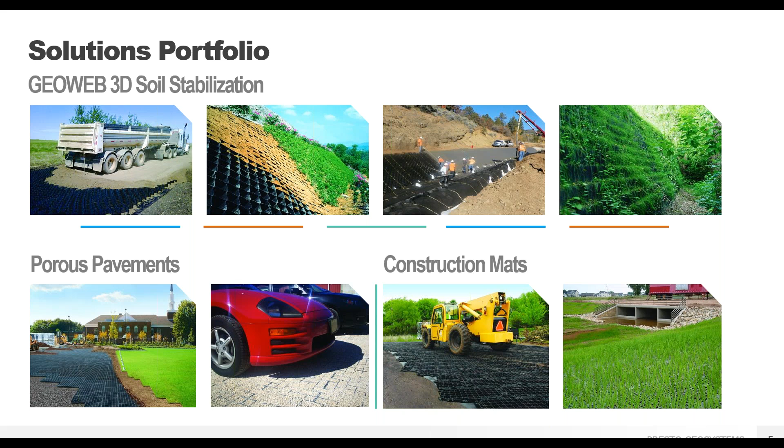Presto operates in 3 general product areas: soil stabilization using our GeoWeb geocells, which can be used for load support, slope and channel protection, and building green retaining walls; porous pavements, of which we have both vegetated and aggregate solutions; and lightweight reusable construction mats. Today, we will cover some GeoWeb solutions as well as our aggregate porous pavement product and a few of our construction mats.

An important thing to keep in mind as we go through this webinar, the trails that are made with our products are all considered permeable trails. That is, there is no impermeable paved surface being placed. The final surface is going to be a stone or sand material. This lessens the environmental impact of the trail, reduces the amount of heavy equipment required for installation, often in difficult to reach locations, and improves the overall cost and speed of the project.

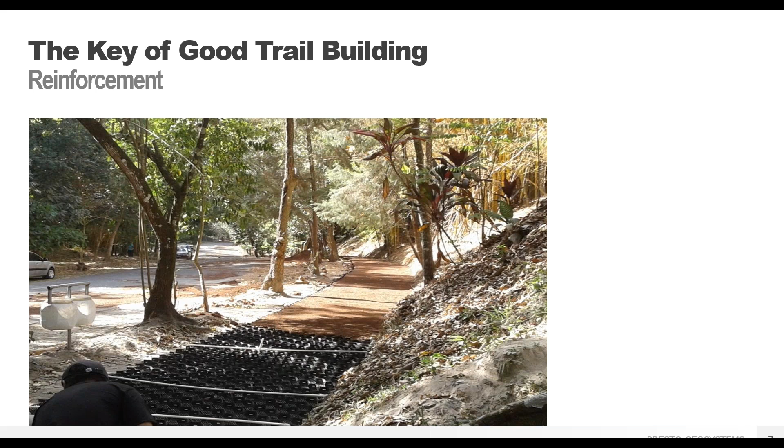We'll begin with what makes a good trail. The first aspect of the design is the reinforcement of the trail itself. Especially when the trail moves through sensitive areas, keeping the path intact is how you keep people away from damaging vegetation or getting lost while wandering. The trail needs to be clearly delineated and needs to be reinforced enough to stay in place over time. Using products specifically designed to act as the reinforcement of the soil or stone means the trail will last longer and will not encroach on the surrounding environment.

The next key to a well-designed trail is drainage. Ponding water can ruin a trail surface, and water that runs off the trail into unreinforced areas can scour and damage those areas. As I mentioned, all the products from Presto are considered permeable, and it is precisely for this reason. By keeping the surface permeable, the water infiltrates at the point of contact right when it hits the trail. The water can then permeate down through the product and into the subgrade, entering the groundwater system. The water won't pond at the surface and it won't run off or collect outside the reinforced area. This keeps the trail in the same condition no matter the weather, so there won't be any flaws or failures created below the surface that you can't see.

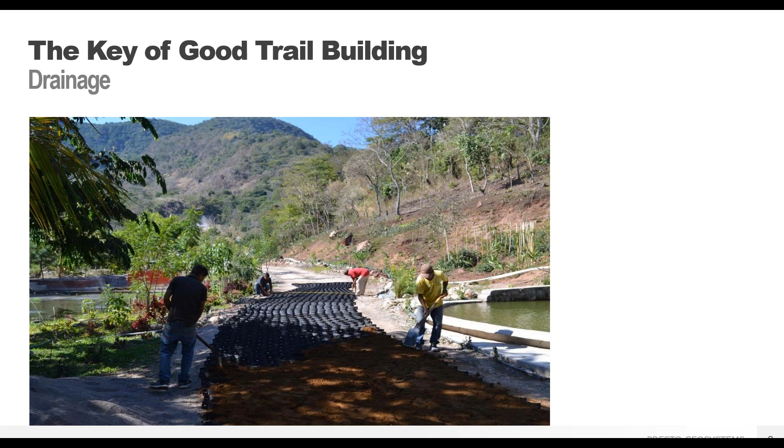The last thing to consider when designing a trail is how to confine the surface. Loose aggregate stone or sand is easily moved under shoes, hooves, tires, and water, leading to ruts, holes, and generally damaged trail areas. When the trail surface is damaged, people are going to want to move around the damage, leading them off the trail and into unprotected areas, potentially disturbing sensitive environments. Keeping the surface in place is an important feature of the products from Presto. When the stone or sand is properly held in place, ruts cannot form and the material can't be washed away. This greatly reduces the amount of maintenance required because the trail surfaces aren't degrading.

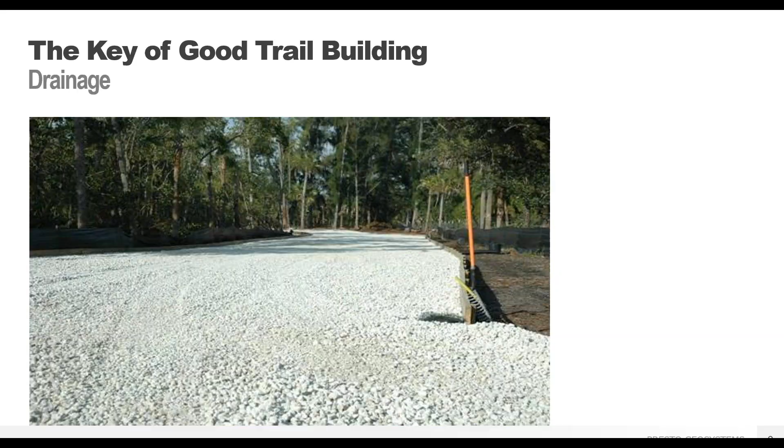The first product we'll look at is the GeoWeb 3-dimensional soil confinement system. This is a geocell in generic terms, which may be something that you've heard of before. It's similar to a geogrid, but is 3-dimensional, so it has depth to provide true confinement and can be used in a wider variety of applications.

The GeoWeb system consists of two main components: cell size and cell depth. The cells come in three sizes, approximately 8-inch by 10-inch, 11-inch by 12-inch, and 18 by 20-inch. The heights of 3, 4, 6, 8, and 12 inches. The combination of cell size and depth depend on the project details and loading requirements, but generally trails will use a 4-inch or 6-inch depth and a small or medium-sized cell.

The seam strength is very important to the function of a geocell. The stronger the seam strength, the better designed the geocell is. A strong seam allows for heavier infill material, steeper and taller slopes, and better lifetime performance. The strength of the panel material, in our case high-density polyethylene, is also critical to the strength and performance of a geocell system.

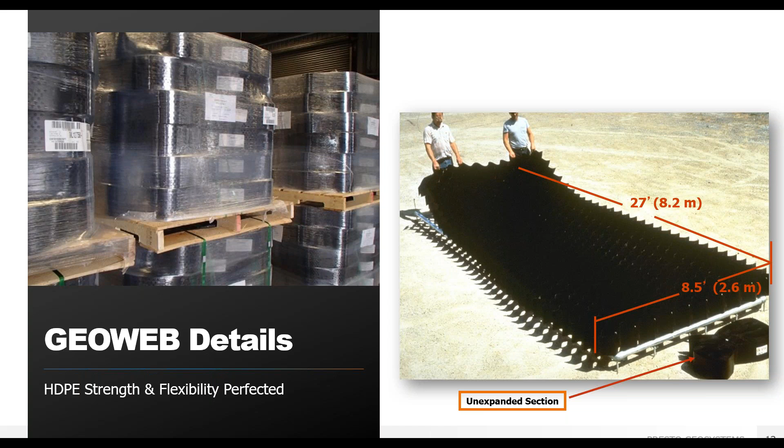Here you can see a typical GeoWeb panel. It comes tri-folded, banded, and palletized. Each section has a nominal width of 8.5 feet with section lengths between 12 and 58 feet. The panels are flexible, opening like an accordion, so they can follow the natural contours of the work site without being confined to a rigid set of dimensions.

GeoWeb and our accessories are 100% made in the USA under strict quality assurance and environmental control processes, sure to comply with all requirements for Build America, Buy America, and the Infrastructure Investment and Jobs Act.

The GeoWeb system is a 3-dimensional cellular confinement system, meaning that the GeoWeb panels have individual cells that are filled with an infill material that ultimately makes the final surface of the trail. By confining the infill material, the system distributes the loads and prevents rutting, and the cells keep the infill in place so that it doesn't wash away from stormwater runoff or move with traffic. The surface of the trail is going to be stable no matter what infill is chosen and require very minimal maintenance for the lifetime of the project.

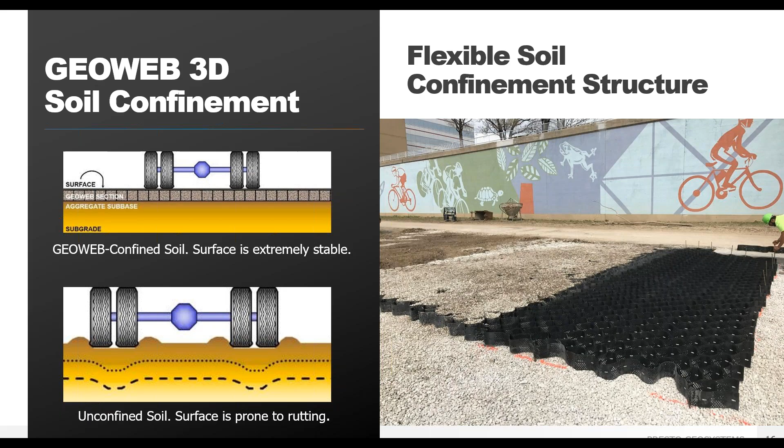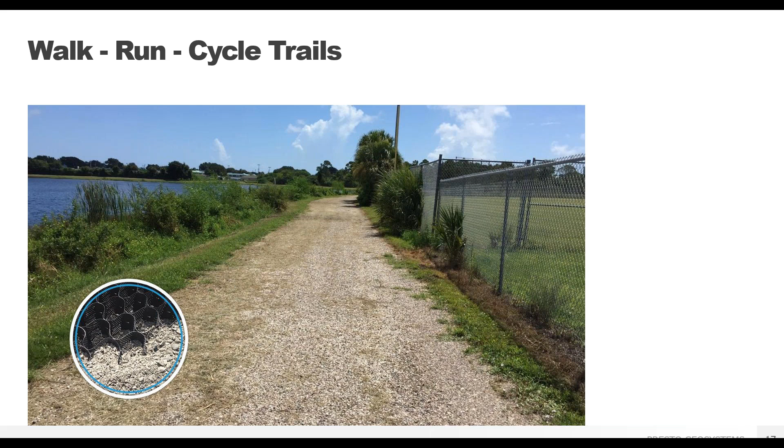Let's look at some different options for building stable trails with the GeoWeb system. Walk, run, cycle trails are meant for people, small animals such as dogs, and bicycles only. This type of trail is not meant for equestrian use. These are the most common types of trails and can go along shorelines, through urban areas, or through forests or parks. The flexibility of the GeoWeb panels allows for smooth, natural-looking curves.

The panels can be held open with stakes, as shown here, but those stakes are generally not permanent. They can be removed once the panels are fully filled. The panels can be laid either along the length or width of the trail. They are easily field cut with a saw or landscape shears and are securely attached together. No matter the dimensions, there will be little waste as panels can be pieced together in nearly any configuration.

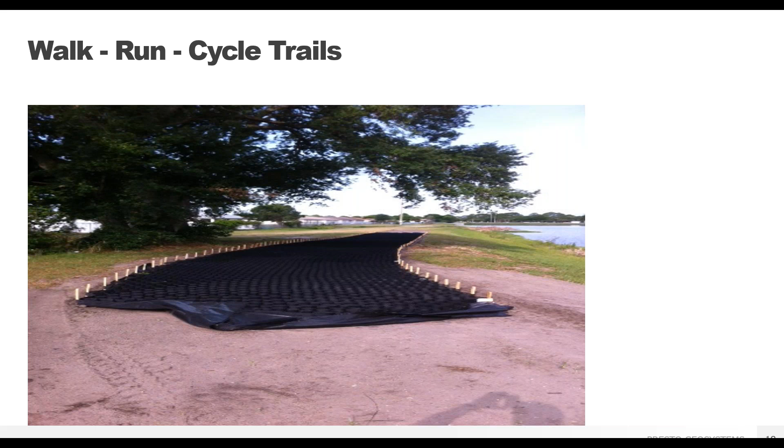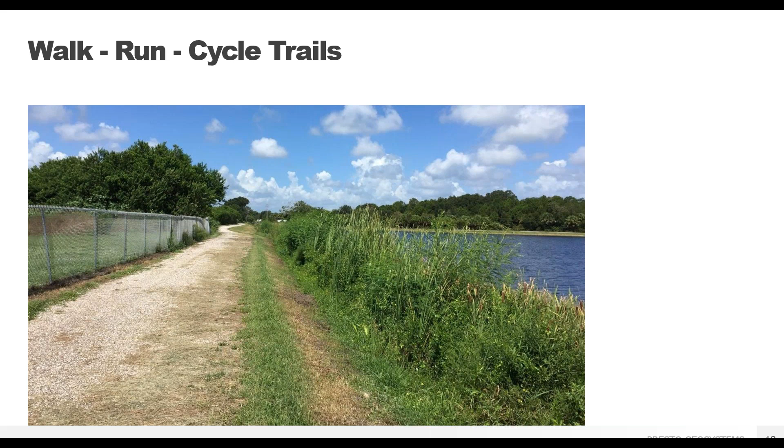This is the finished trail surface using a local granite aggregate and allowing vegetation on both sides. The trail is clearly delineated and meets up with existing paved trails in the distance. The GeoWeb panels will keep the trail in place and level, minimizing surface erosion and potential for runoff of contaminants into the adjacent water. This path used granite, but any type of stone is going to be acceptable as an infill material, with the only limitations being it should be angular and have a maximum particle size of 1/3 the cell depth. So you can use what is local to your area without needing to truck in expensive engineered aggregate.

As I said, it's easy to field cut the GeoWeb panels to accommodate the trail dimensions, even rather narrow trails like this one between a road and protected wetlands. By having the GeoWeb panels create the trail, water runoff from the road won't wash dirt into the wetlands because the water will be able to infiltrate through the permeable GeoWeb surface, keeping the dirt surface in place for a nice jogging path.

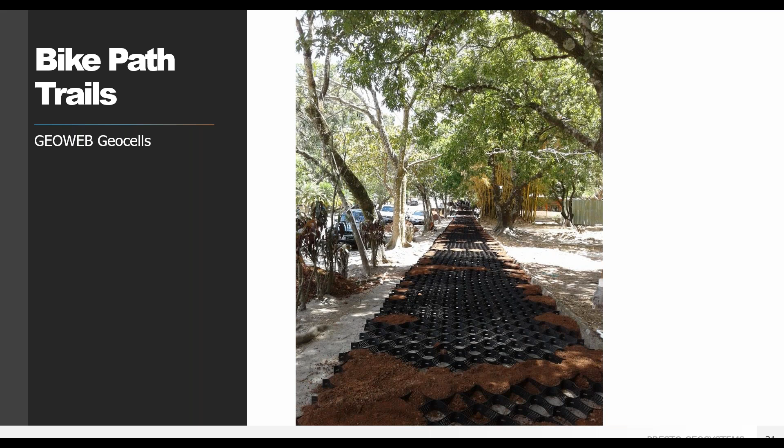Paths through neighborhoods or urban areas can augment or replace traditional sidewalks in places where drainage is a concern. Replacing broken and ugly concrete sidewalks with gravel surface paths allows for flexibility in design and aesthetic and will improve the safety of the walkway for pedestrians. These types of trails are good for any typical sidewalk traffic, but can also be designed to support cars or trucks.

A 3 or 4 man crew can install about 1,500 square feet of GeoWeb panels per hour, including laying a geotextile fabric and infilling the panels. The geotextile helps create a separation layer between the natural subgrade and the infill material, especially important in areas of very soft subgrades such as wet clay.

The flexible nature of the GeoWeb panels allows it to conform to hills and dips in the paths and allows the system to be pitched to one side if needed. Because GeoWeb gives additional strength to the infill material through confinement, cross sections can be cut in half or more, reducing excavation, aggregate, and maintenance costs.

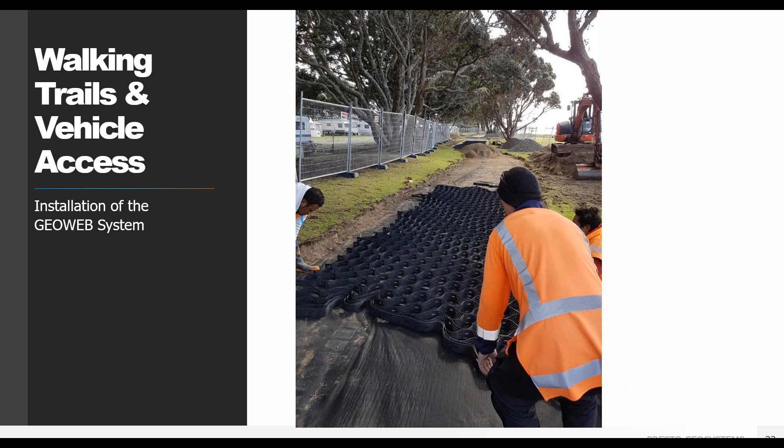We recommend overfilling the GeoWeb panels slightly when installing so that there is a wear surface over the panels and the plastic is not visible. This surface will become naturally compacted over time with trail usage. Having the panels slightly overfilled helps protect the GeoWeb material from vehicle tires or other potential damage.

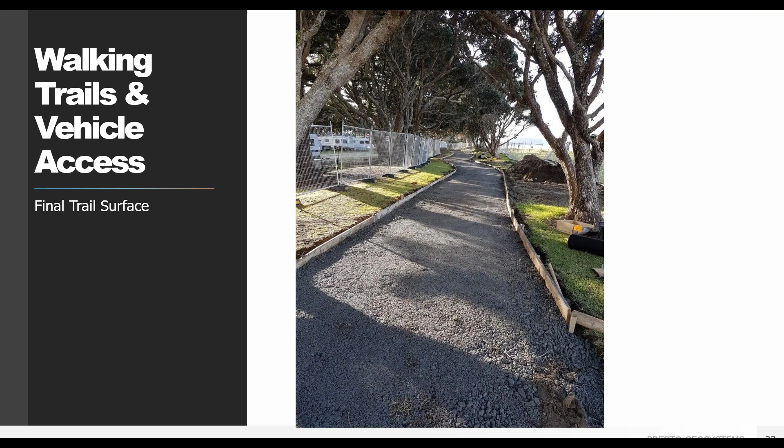Equestrian trails are next, and they have some different requirements than walking paths. Equestrian trails have to be hardy enough to stand up to horseshoes while remaining smooth enough to avoid damaging their hooves. Horseshoes can pick up a surprising amount of dirt with each step, and with their heavy concentrated point loading can cause fast deterioration of the trail. If the trail is designed to withstand horse traffic, it is more than sufficient to handle hiking, biking, and small motorized vehicles.

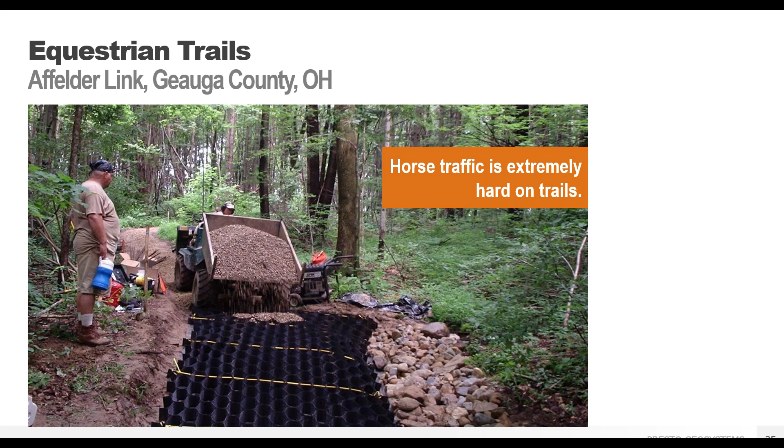A GeoWeb trail system was utilized for erosion control for these equestrian trails. The gravel surface is resistant to rutting, and the 1-inch stone size is easy for the horses to walk over. This aggregate path will not get muddy or create sinkholes, so the surface will remain ready for use even after rain or heavy use. Having a well-defined path also helps prevent damage to areas off the trail, and using the GeoWeb system allows for inclusion of natural markers, such as the large boulders we see here on both sides of the system.

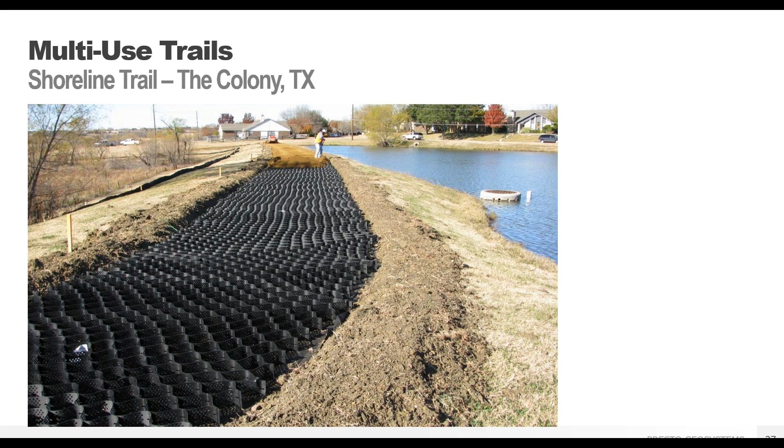Now we're going to walk through a case study for a shoreline trail in the city of The Colony, Texas. This project was a multi-use trail along the shoreline of a lake. The trail will see pedestrians, bikes, small vehicles, and potentially equestrian traffic. The client, the City of The Colony, wanted to follow the natural contours of the shoreline, which the flexible GeoWeb panels can easily handle.

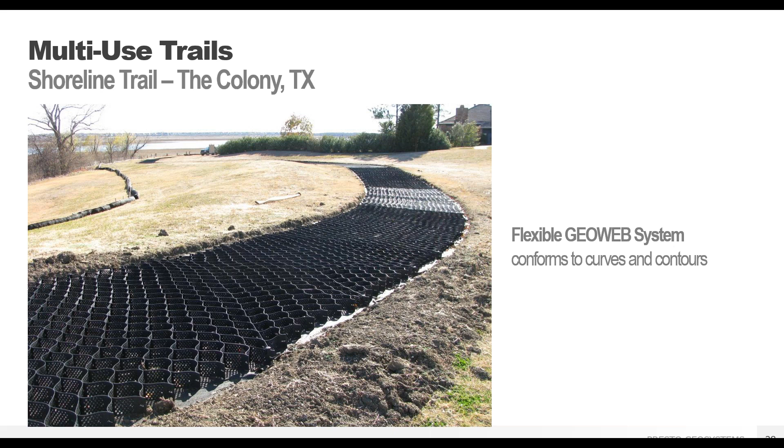There was concern about the potential for uplift under the system due to the very high water table and lake level fluctuations, so additional steps were taken to prevent this from occurring. A series of polyester tendons were run through the GeoWeb panels and were anchored multiple times per panel. The tendons, in conjunction with the final infill stone material, prevent the GeoWeb system from lifting and deforming due to groundwater pressures. This is good practice in wet environments with potentially saturated soils.

A well-graded decomposed granite was chosen as the infill material as it was readily available in the area. Using local materials is encouraged, though any type of stone is acceptable as long as it is angular and allows good drainage. This means that you are going to want stone with limited fines so that water can percolate through. If the water can't infiltrate, you will get ponding at the surface, similar to a paved surface such as asphalt. So you want to make sure your infill material avoids this problem. And you should keep in mind that this material is going to be your final surface, so aesthetics may be a factor in choosing the infill material.

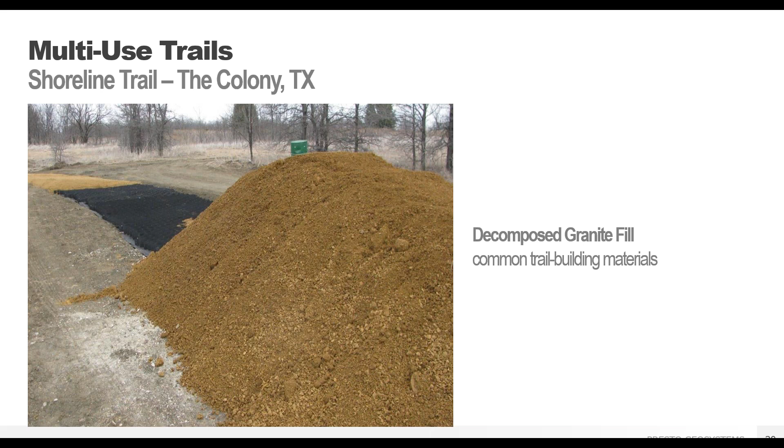Once the GeoWeb panels were installed, the infill was placed with a standard front end loader and then raked by hand to ensure all the cells were completely filled. The material should be placed on the outside of the panels as needed to match the final grade and meet up with the unexcavated areas.

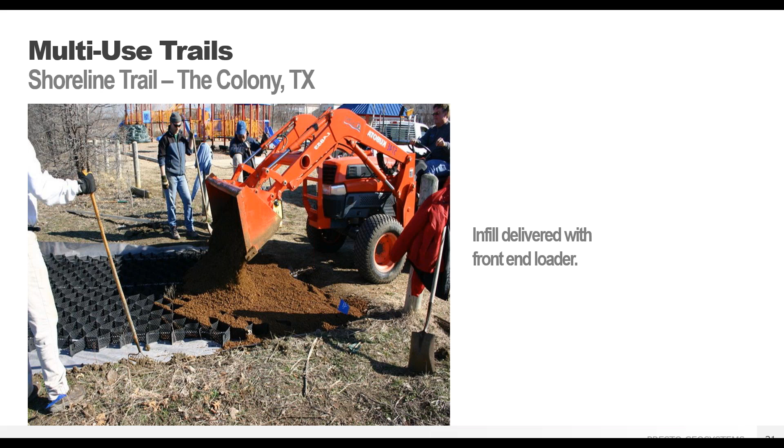For ease of construction, you can drive your vehicles and equipment on the GeoWeb panels as soon as they are filled, right up to the limits of the filled area if necessary, so you don't have to wait for the entire system to be filled before using it. This can help minimize the impact of construction on the area, since you won't need to create access lanes or clear out excess vegetation on the sides.

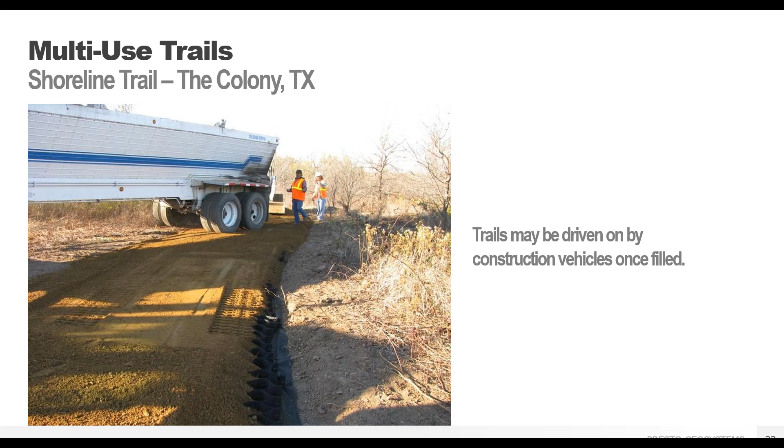A small, smooth-barreled roller compactor finishes the job. This is where having the wearing surface of overfilled material mentioned earlier comes into play. The compactor isn't driving directly on the GeoWeb panels, and you can easily visually confirm that no cell is underfilled.

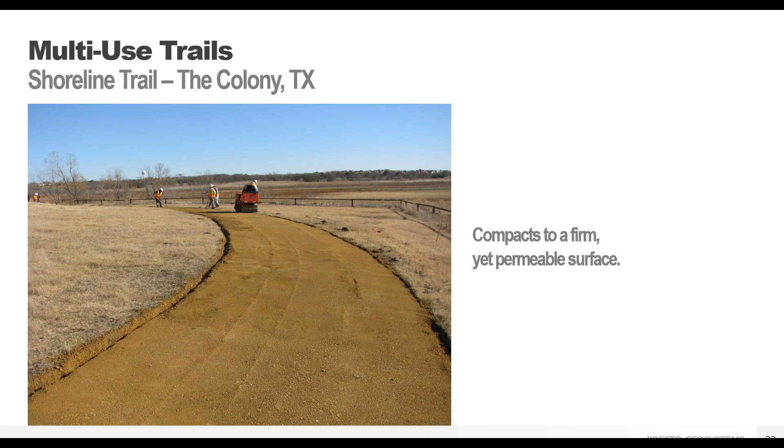Again, the stone infill should have minimal fines, generally less than 10% is ideal. Avoiding fines in your stone allows the system to stay permeable and not get clogged.

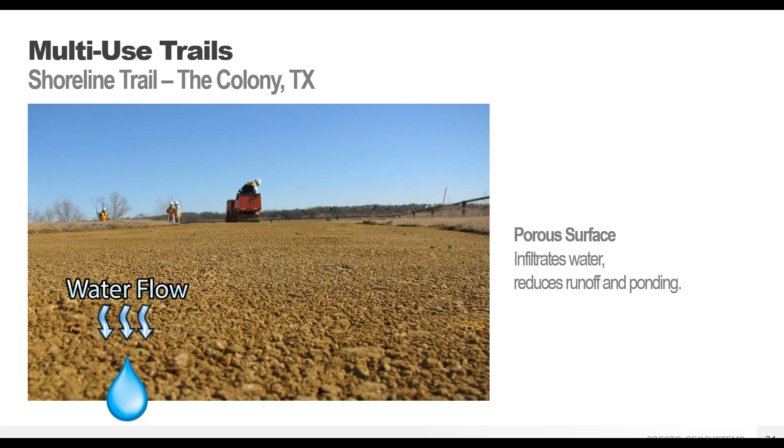Trails built with the GeoWeb system are a great example of green infrastructure by not disrupting the water cycle or impacting groundwater flow. No additional stormwater infrastructure is needed when the trail surface is permeable, so there is minimal impact on the environment around the trail.

Here we can see the nice clean trail created using GeoWeb, allowing for most uses without having to worry about needing constant maintenance. This path is clearly delineated while maintaining a natural look that people won't mind seeing in their backyards.

A few months after installation, there was a massive rainfall event, over 7 inches in a 3-hour period, which can be incredibly damaging both during and after the storm. Several portions of the trail were flooded to the point of standing water at the surface on and around the GeoWeb protected areas.

But thanks to the GeoWeb system and the extra precautions, such as the tendon system, the trail was not washed away as you might expect from an unprotected gravel trail. The trail was still usable, allowing maintenance workers access to the damaged areas for inspection and repair. No repair was needed to the GeoWeb system, and once the water was able to infiltrate, the trail was as good as new.

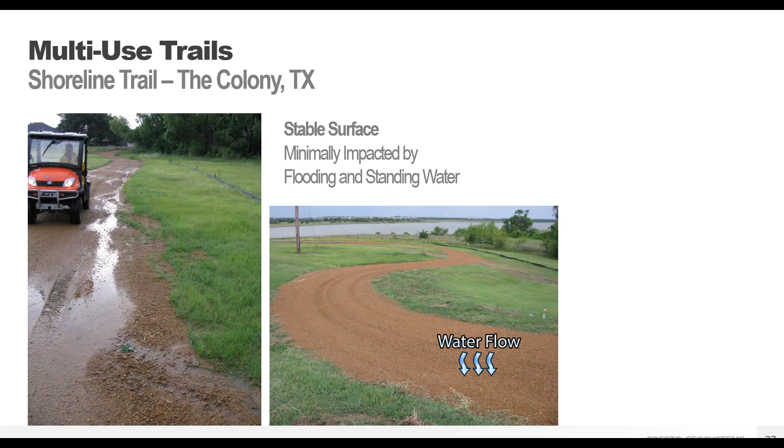When there is such a large rainfall event, the groundwater becomes saturated and doesn't allow water to infiltrate, giving it no choice but to stay at the surface and become sheet runoff. The GeoWeb system protects the trail surface against erosion when this happens, with the cell walls functioning as a series of check dams, keeping the infill confined within the individual cells. Then when it is able, the water can infiltrate into the ground and the trail is still in good shape.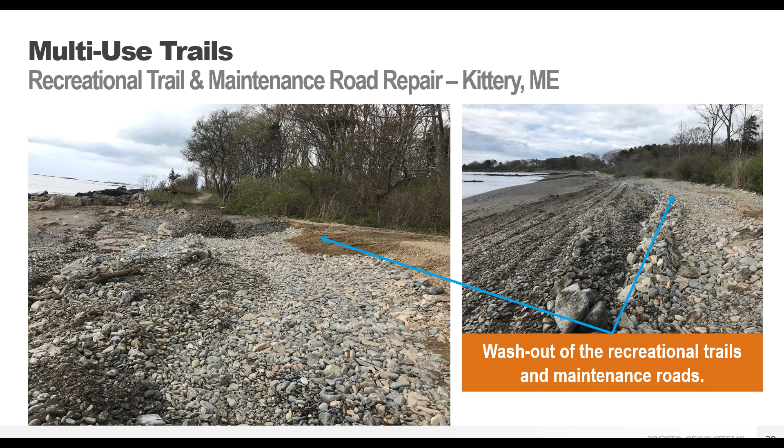To reconstruct the washed out recreational trail and maintenance road, 6-inch deep GeoWeb panels were installed at the site and infilled with 1-inch crushed aggregate.

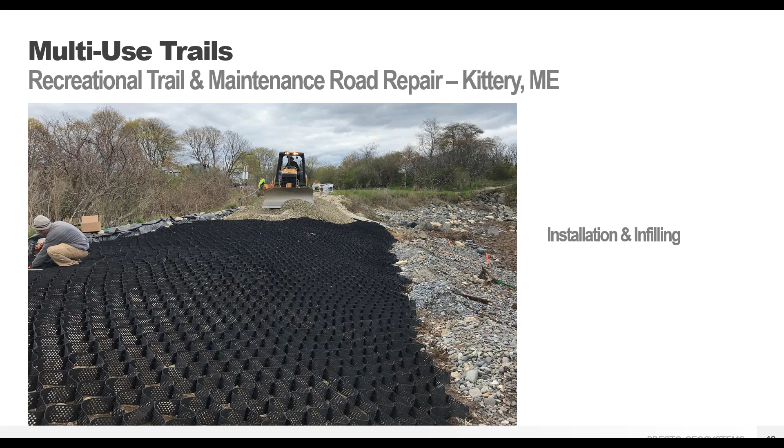There were sections of the trail that sloped down to the beach areas. To stabilize the 2-to-1 sloped areas down to the beaches, 4-inch deep GeoWeb sections were secured to the face of the slope using deadman tendons and Atra tendon clips. Then the GeoWeb was filled with aggregate and covered with large riprap.

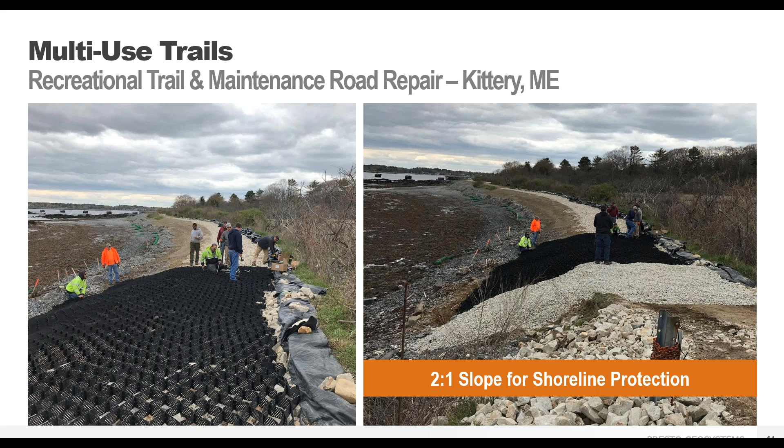By using the GeoWeb system, the park was able to armor the maintenance road, recreational trail, and slopes from future storm events. Here's a before and after photo of one of the trails.

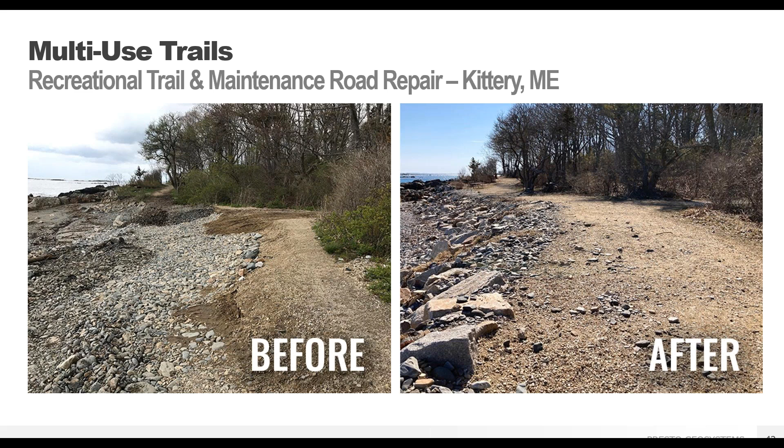Since its original installation in 2018, the GeoWeb load support and shoreline protection system continues to perform as designed, allowing the community to once again enjoy the trail system and local beaches.

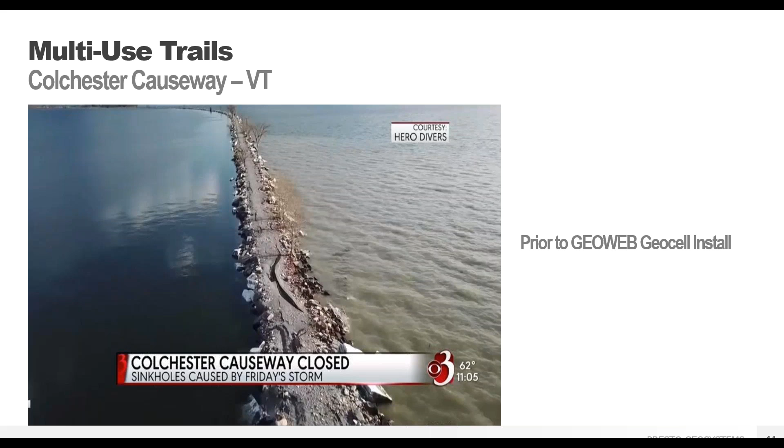Now we'll move on to another project, Colchester Causeway in Vermont, which was used as a walking biking trail across Lake Champlain and was blown out due to storms and had to be closed.

The local distributor worked with the town and submitted a request for project evaluation through our website. Here you can see Presto's recommendation of the mid-sized cell, 4 inches deep.

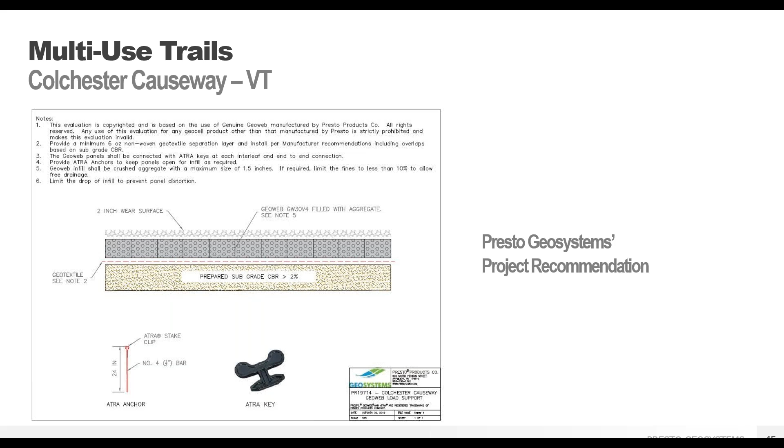Installation took place in November of 2019, and the trail is holding up well after several significant storm events.

One of the biggest questions we get is about cost, especially if this is a new technology for you and your area. Having an idea of how much the GeoWeb system costs compared with other stabilization techniques is very important. So here we have a basic comparison for the GeoWeb system for a load support application, in this case a gravel surface road.

The comparison shows the difference in both price and cross-section depth for an aggregate-only unreinforced section, a section using geogrids and geotextiles, and then 2 sections showing the use of the GeoWeb system, one with aggregate and one with salvaged on-site materials as the infill.

You can see the GeoWeb system is both thinner and less expensive than the other methods, significantly so when on-site material is utilized. In fact, a 50% savings can be realized compared to the geogrid geotextile section, which does not allow for the use of most salvaged or on-site material, as high friction angle, well-graded material is required with the use of both grids and textiles.

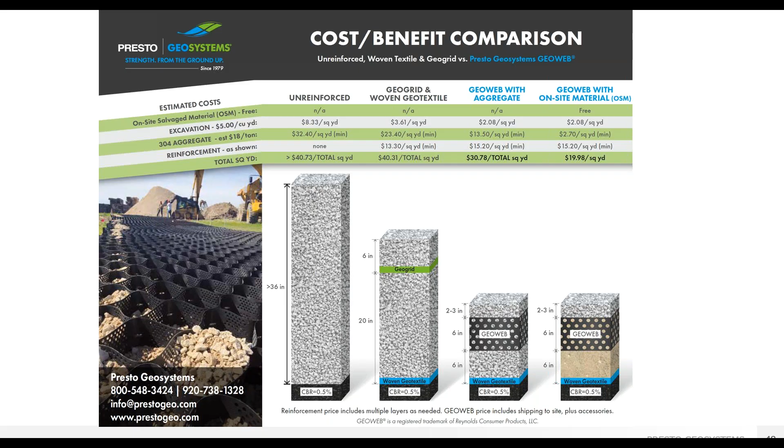Now moving away from the GeoWeb system.

This next option illustrates similar confinement of infill, but within a rigid paver structure, our GeoPave units. Unlike the GeoWeb material, which is typically 3 or 4 inches deep for trails, GeoPave units are 2 inches deep and made from recycled polyethylene.

The GeoPave units have these rigid paver characteristics, with specific features needed for performance with aggregate infill. The main one I want to highlight is the monolithic mesh bottom.

This is a molded in place mesh on the underside of the paver unit. This mesh keeps the stone infill from migrating under the unit, and the integrated nature assists in the overall rigidity of the paver unit. The lattice bottom spreads the load similar to a snowshoe, so the wheel loads do not create ruts.

GeoPave units are locked together with a connection device to create a fully integrated contiguous pavement that is highly resistant to traffic stresses.

GeoPave was designed using a finite element analysis and will not lift up over time as seen with other systems. And as I mentioned, the GeoPave unit is only 2 inches deep, which can be a real asset if the project requires a thin cross section due to buried utilities or high excavation costs.

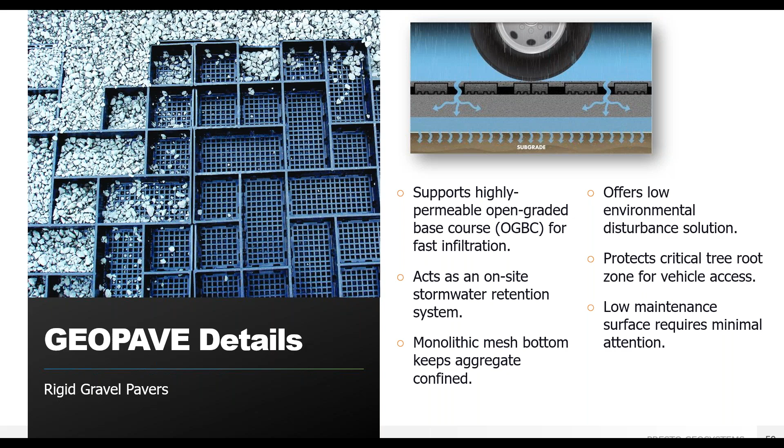We'll now look at a few project examples. This project is an access trail for walking down to a swimming area on a lake. The walkway had to be ADA compliant so that everyone could use it. It was also important that the trail help reduce runoff into the lake, so the permeable nature of the GeoPave system was critical.

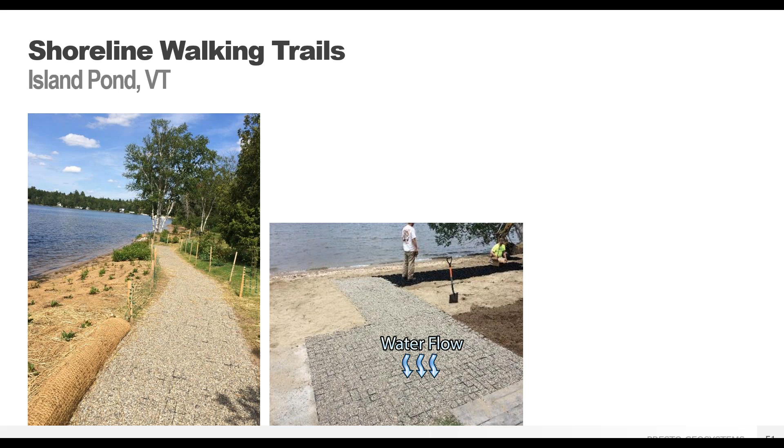This is another trail in a wetlands area. Here, the GeoPave units were placed directly on the subgrade, but a geotextile separator fabric and a base layer of aggregate underneath the panels can be incorporated to support heavier loads or add additional detention. No matter the section, the entire system creates a flat, stable surface and supports the anticipated loads.

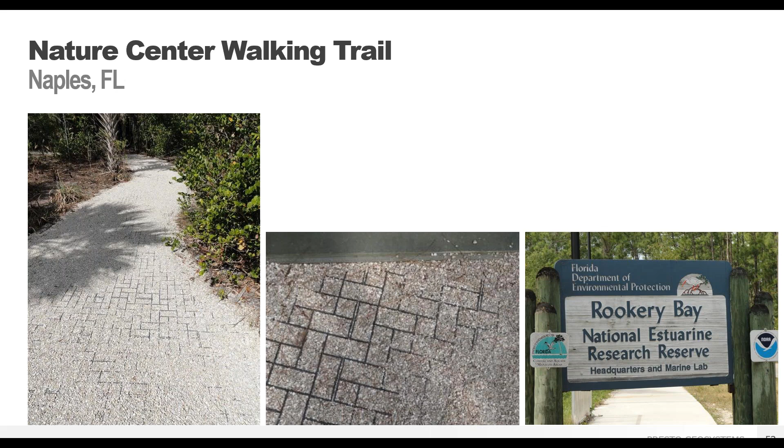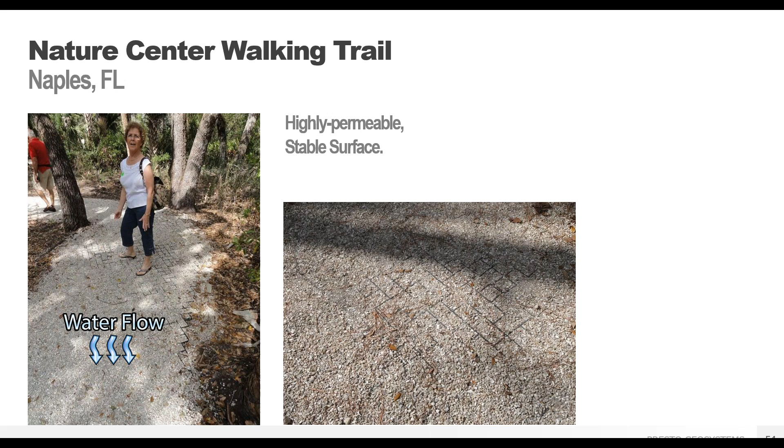The same principles that we discussed with the GeoPave system apply here as well. By using an open graded aggregate stone with minimal fines content, the water can infiltrate at the point of contact, reducing surface runoff, and the individual cells confine the aggregate, preventing rutting and washout of the stone for a stable walking surface.

A major concern here was protecting sensitive tree roots from impact damage. The GeoPave units are a great way to provide tree root protection by creating a bridge over the roots, so there is no direct contact from vehicle or pedestrian loads that could harm the trees. This bridge lasts the lifetime of the GeoPave trail and allows the trees to grow unimpeded.

One of the great things about building trails with the GeoWeb or GeoPave system is the amount of choice you have over the final look of the system. Two rock colors were chosen at this site to delineate the parking from the walkways. A light colored crushed limestone was used for the parking areas, and a contrasting reddish brown buckshot crushed aggregate for the walkways. Additional delineation, such as concrete parking stops or snap delineators, can also be included to help create a sense of separation within the overall GeoPave system.

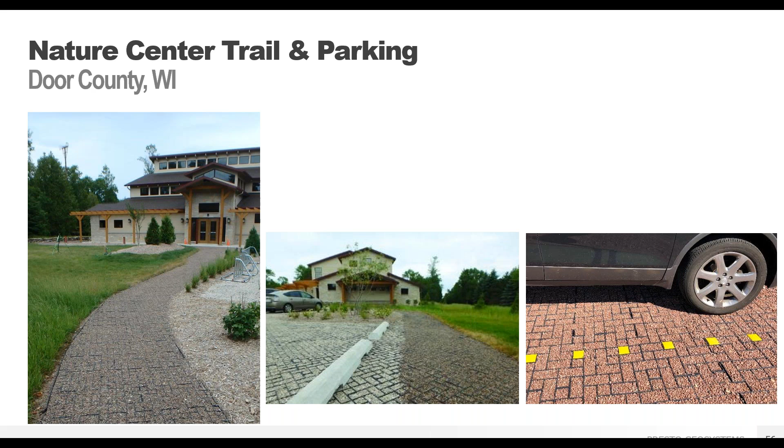This project ultimately earned LEED Gold for all of the low impact structure and landscape elements. Protecting the local watershed was the primary reason for the inclusion of the permeable parking and walkways utilizing the GeoPave system. These pavements also perform as natural on-site stormwater detention, storing water in the base for natural percolation without the need for a large isolated detention pond, which would have been an unattractive nuisance on site.

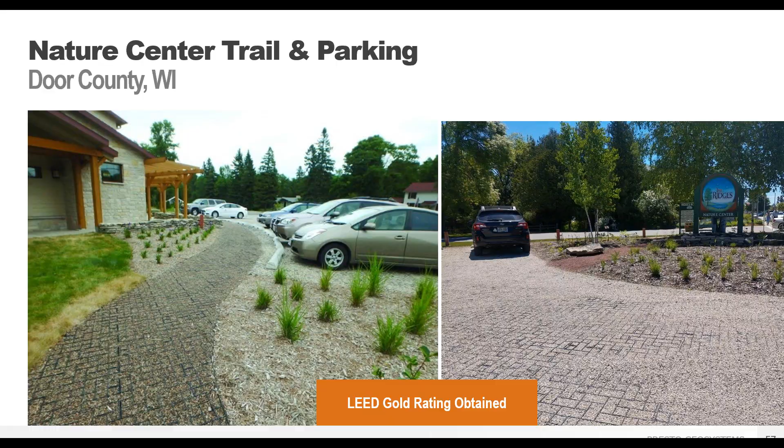The GeoPave units come in 20 by 40 inch panels covering approximately 5.4 square feet, but they can easily be field cut or staggered to accommodate curves, so you are not locked into a linear path.

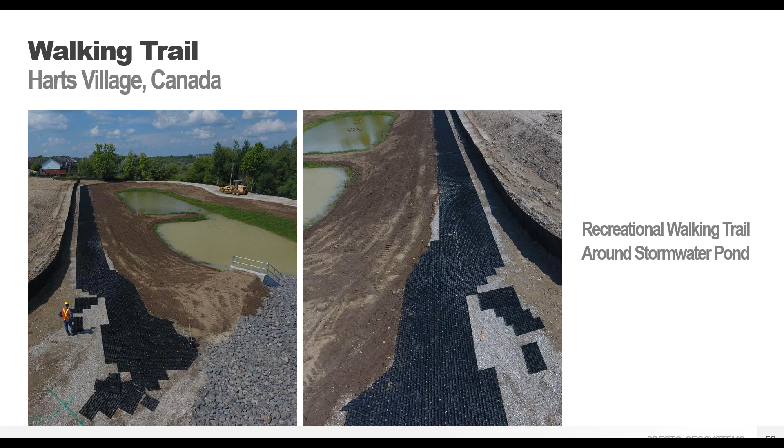The system was a great choice for this project with a quick and easy installation, the ability to allow water to flow through the system and not run off into the pond, and providing a smooth, clean surface for walking.

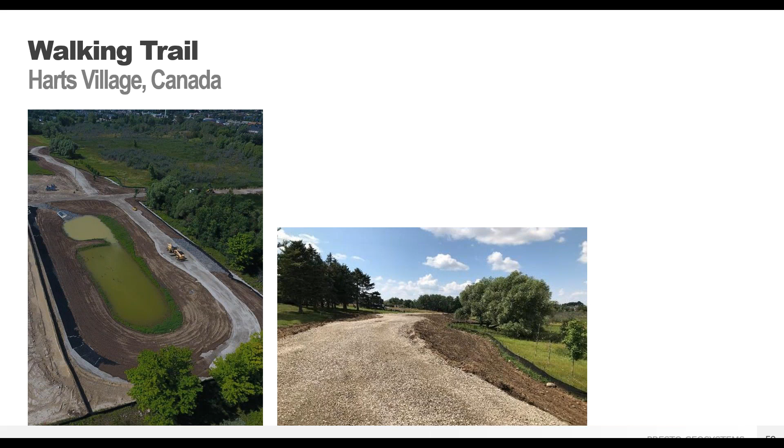The standard GeoPave units are black, but a tan GeoPave is an option that allows natural blending with light-colored stone. Again, the options available for the final design of the trails are what make using this system so versatile and a great choice for any job.

The last option for trail surfaces is the GeoTerra system, which are construction mats that are strong yet lightweight and don't require any fill. Because no fill is required, they are perfect for areas where infill resources are scarce.

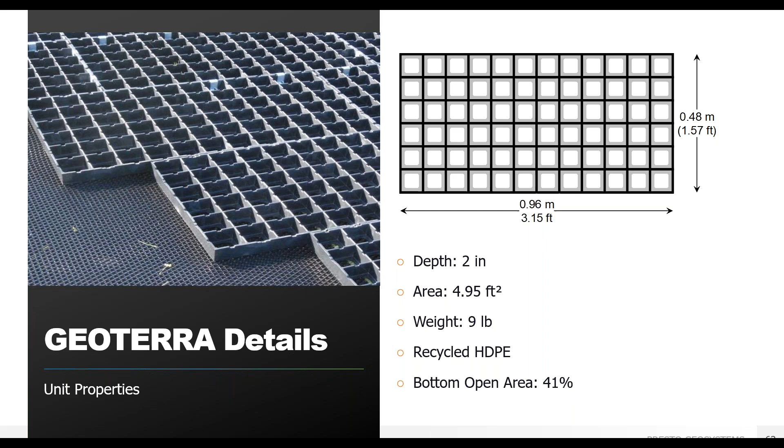GeoTerra units cover approximately 5 square feet each and can be connected to cover as large of an area as needed. The mats are strong enough to support heavy vehicle and construction traffic loads and have enough flexural strength to bridge soft soils without warping or cracking.

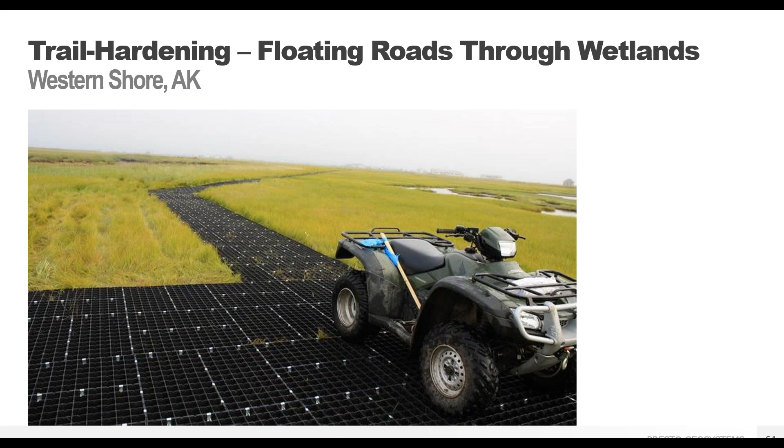The GeoTerra units are connected with strong metal connectors to essentially form a floating road through wetlands with very soft soils. The connected mat system distributes loading across the pavement, minimizing potential for rutting or sinking in soft, muddy soils.

In some areas of Alaska, hundreds of miles of ATV trails cut across wetlands and stream beds, causing extensive damage to natural preserves. ATV riders can cause the loss of vegetative cover and habitat values. GeoTerra mats offer a great solution for low impact access in these wet and environmentally sensitive areas.

The preferred method is to place the units across the entire trail width, but in some cases, just in the wheel paths is acceptable.

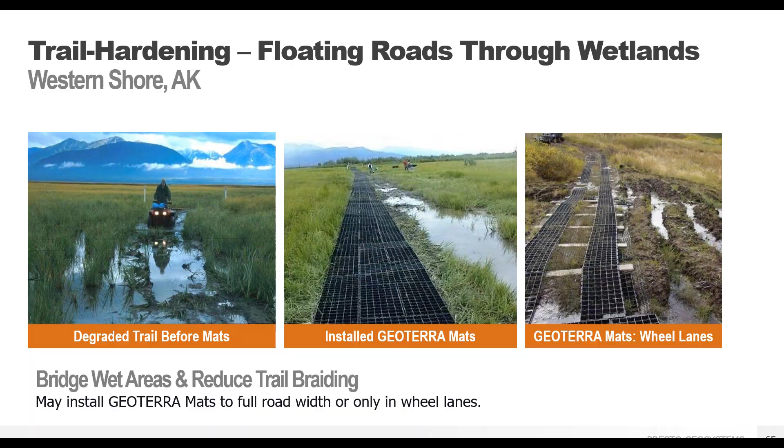As planned, indigenous grasses regenerated through the permeable open-celled GeoTerra mats, ultimately semi-camouflaging the product with the natural environment and protecting the vegetation from damage. In this case, the system ultimately ended up as a permanent structure, and the GeoTerra mats will be able to last for as long as needed.

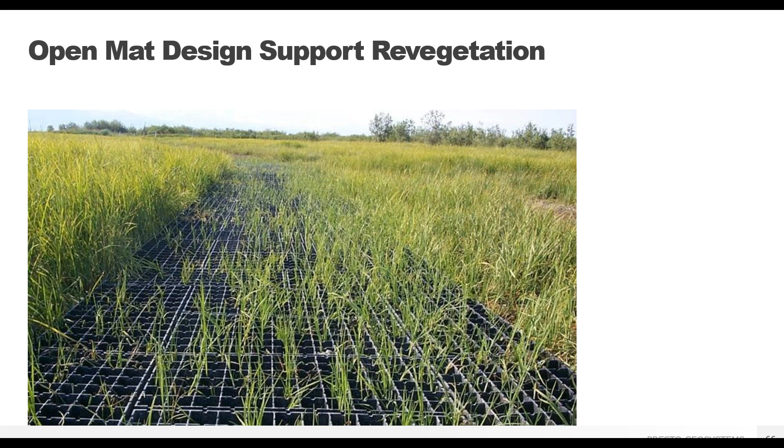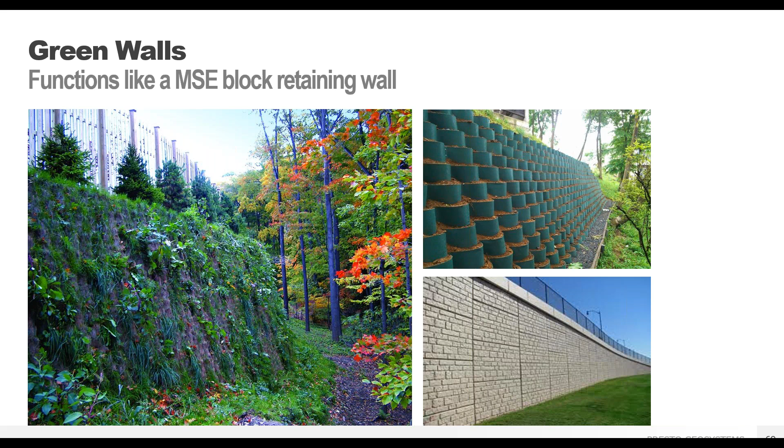The primary benefit of the GeoWeb wall is to create a stable, natural living structure with vegetation for aesthetic appeal. The open front fascia allows rainwater to infiltrate. The wall structure can also absorb some runoff from the top of the wall, such as from walking trails.

While vegetated walls are most common, aggregate-filled walls are also possible. Using the same open graded aggregate we have been talking about, water can infiltrate through the wall so there isn't runoff onto your road or trail.

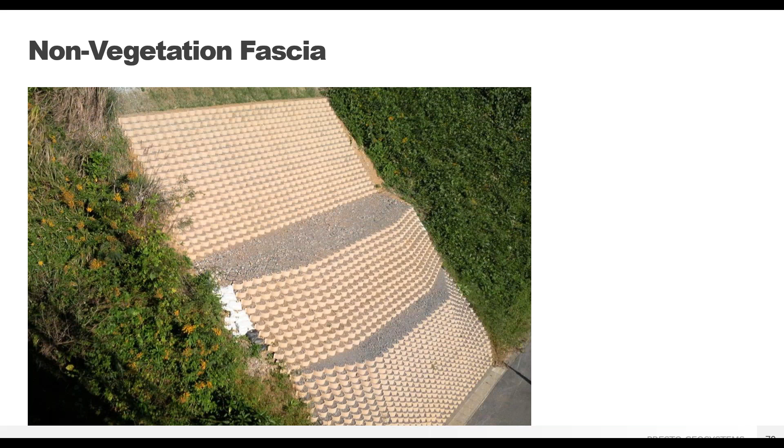An aggregate wall may be useful when you don't want to worry about maintaining vegetation in an area, such as an emergency response space or in areas where vegetation is difficult to establish.

The walls are designed as either gravity or reinforced walls in the same way as mechanically stabilized earth or MSE wall systems. An advantage they have over MSE block walls is flexibility in poor soil conditions. Their relatively lightweight and flexible nature allows them to tolerate reasonable differential settlement very well.

Another advantage over traditional walls, such as gabion basket walls, is the relatively shallow embedment depth of the wall and the ability to create a very steep wall face, generally up to 80 degrees.

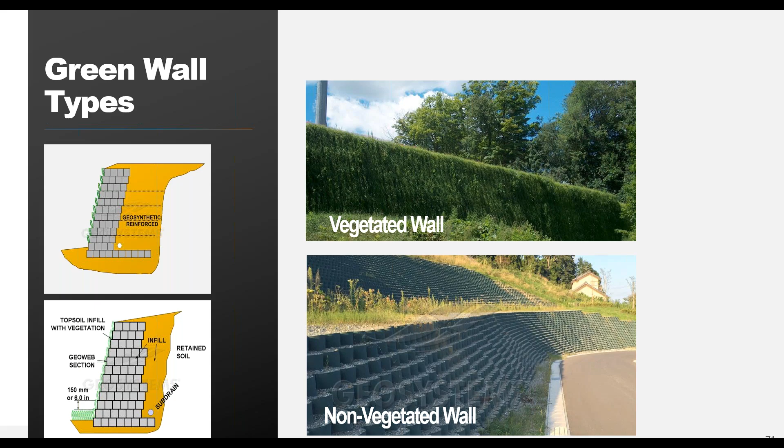It's always necessary to consider both live and dead loads that the wall will experience, especially when placed near trails or roads. Dead loads can be buildings or soil slopes above the walls, while live loads are for construction traffic and long-term vehicle traffic. When possible, the load should be placed away from the edge of the wall or fascia.

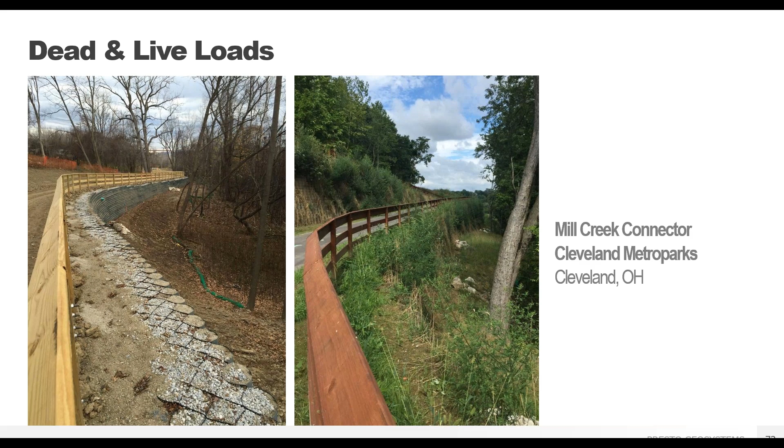We'll now look at a vegetated retaining wall case study. This project was faced with having to retain soils in a very problematic soft soil area, but piling systems were expensive and they wanted to maintain the natural environment.

Concrete and modular block walls were considered, but ultimately they chose the vegetated GeoCell wall for its natural aesthetics and lower cost.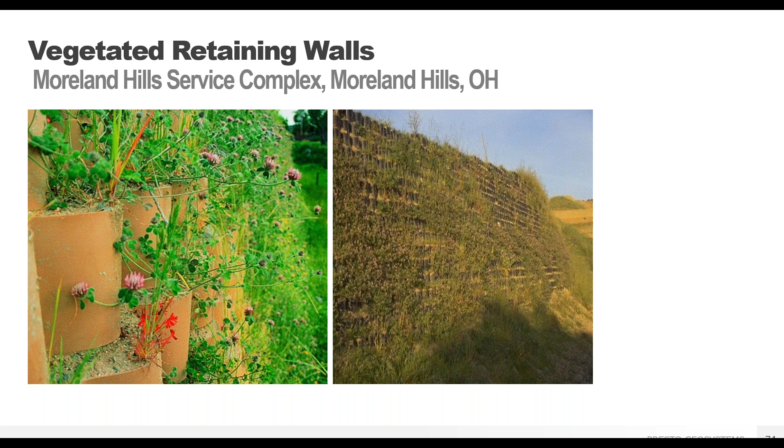Here you can see the wall structure is constructed with a slight setback to allow for topsoil fill and vegetation in the front cell. The backfill material is a good drainable aggregate.

The wall can be seeded either by mixing the seeds in the soil before installation or by hydroseeding or broadcasting once installation is complete.

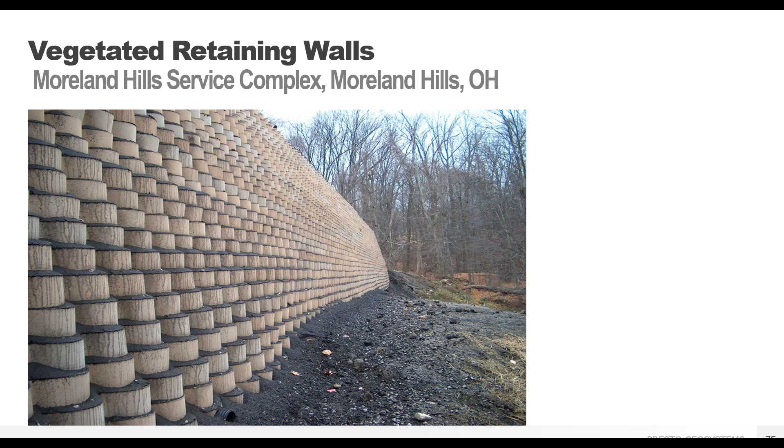As mentioned, the system's inherent ability to withstand some differential settlement in soft soil environments was extremely important at this site. The wall had varying heights along its length, which was also easily accommodated with the GeoCell system.

By using the GeoWeb wall, they didn't have to bring in invasive equipment such as augers or H-piles, speeding the installation process.

Here is the completely vegetated wall. The horizontal terraces allow rainwater collection, helping to minimize runoff and erosion. Pretty much any type of grass or flowering vegetation will survive on these walls. So by using local vegetation, upkeep can be kept to a minimum.

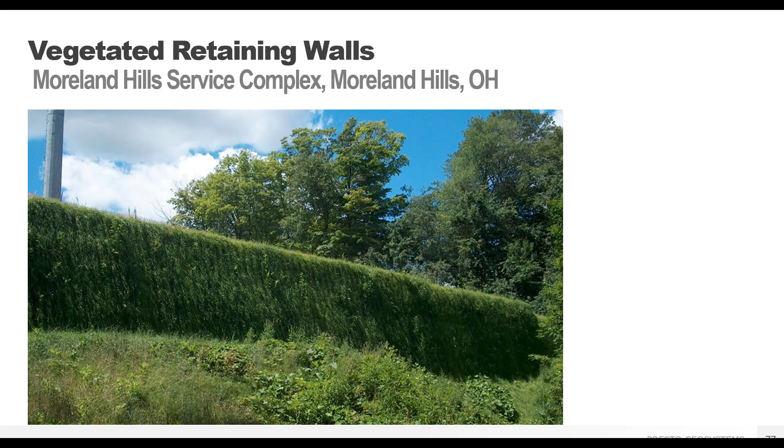Presto Geosystems offers a free software for designing GeoWeb retaining walls and slopes. It is available on our website, which is prestogeo.com, and can be used by engineers and designers to determine if the GeoWeb system is appropriate for your projects. There are a lot of resources on the website on how to use and interpret the software, but we are always happy to help with questions or recommendations.

So far, we have looked at trail surface construction and vegetated retaining walls. GeoWeb can also be used for erosion protection in a surficial manner. This is a good way to protect slopes against erosion when the slope is shallower than what would be required for a retaining wall and globally stable, generally around 60 degrees or shallower. If there are questions about this type of application, we are happy to talk through it.

There are three main infill types for slopes, depending on the type of protection needed: topsoil, aggregates and granular materials, and concrete. We will focus on topsoil and vegetation infill, as that is typically what is selected in trail applications to keep things looking as natural as possible.

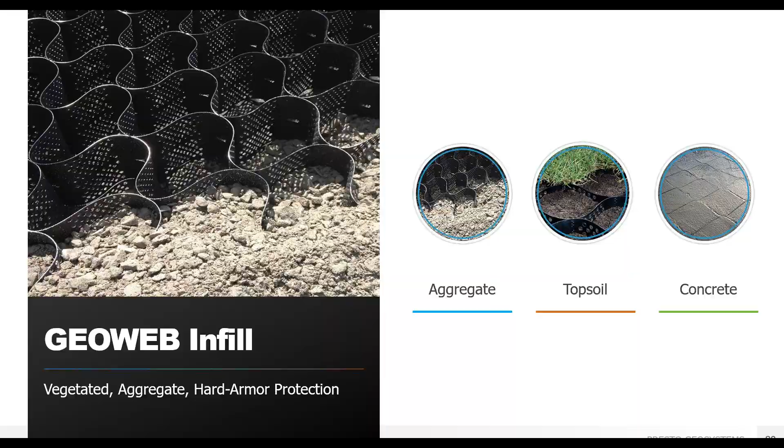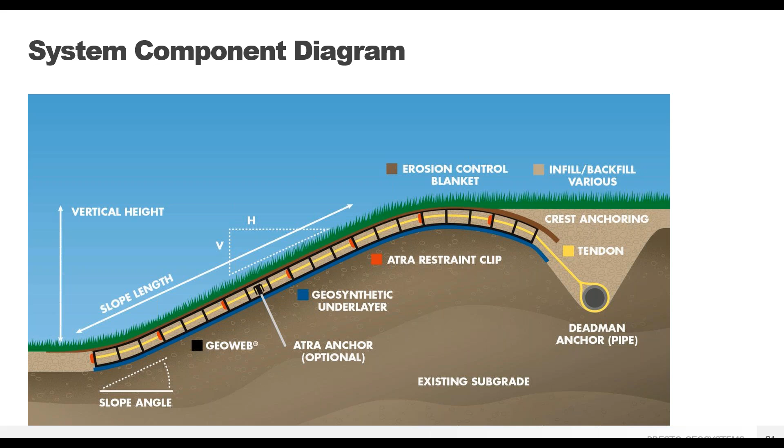The GeoWeb is then filled with the desired infill material, and if vegetated, an erosion control blanket or hydroseeding is used until vegetation is established.

The ATRA key is the first component for a completely integrated system, connecting each individual panel of GeoWeb into a single web that covers the slope. It allows for fast installation of the GeoWeb and will last the lifetime of the project, ensuring that the slope is protected and that the GeoWeb system will not fail under anticipated loads. The specific engineering values of the ATRA key will ensure the system holds up to loading over time without the corrosion seen in staples or the failure of underperforming cable tie systems.

As slope angle increases, the driving force of the infill material exceeds the available frictional resisting force, and additional anchorage is required. The ATRA anchors, which are ATRA clips on top of number 4 or 1/2 inch diameter rebar, hold the GeoWeb to the slope and penetrate into the ground. If corrosion resistance is required due to project conditions, Presto has a polyethylene ATRA speed stake that is designed to work with the GeoWeb.

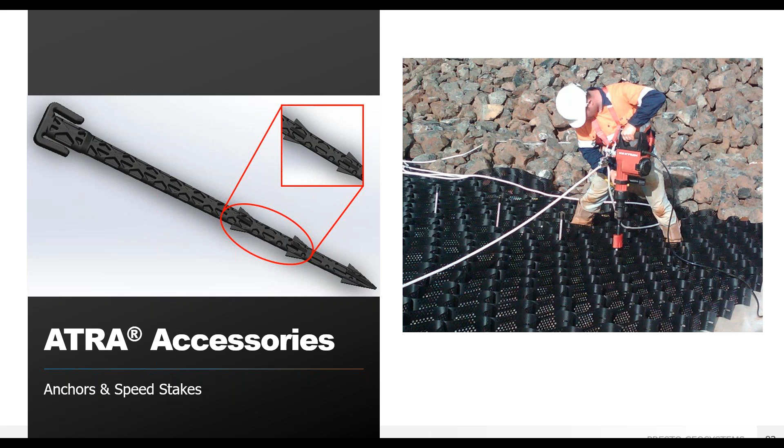For long, steep slopes where the native soil is highly erodible, or over a surface that cannot be punctured, such as a liner, tendons can be used for anchorage. The ATRA tendon clips transfer the load from heavy infill material to the tendons and crest anchorage system. Only the ATRA tendon clip is specifically designed to fully transfer safely and securely the forces placed upon the GeoCell. Every accessory and every feature has been designed and tested to specifically work together so that we go from problem to design to construction solution with a system where the modeling replicates the real world forces.

Now we'll take a quick look at a couple of slope protection projects associated with trails. The American Tobacco Trail is a 20-mile rails to trails project running from Durham County to Chatham County in North Carolina. This slope had to be reconstructed after it was excavated in conjunction with the replacement of a culvert. After the culvert was replaced, the slope was regraded to its original 1.3 to 1 slope angle, and it needed to be revegetated. The GeoWeb slope protection system proved to be the perfect solution.

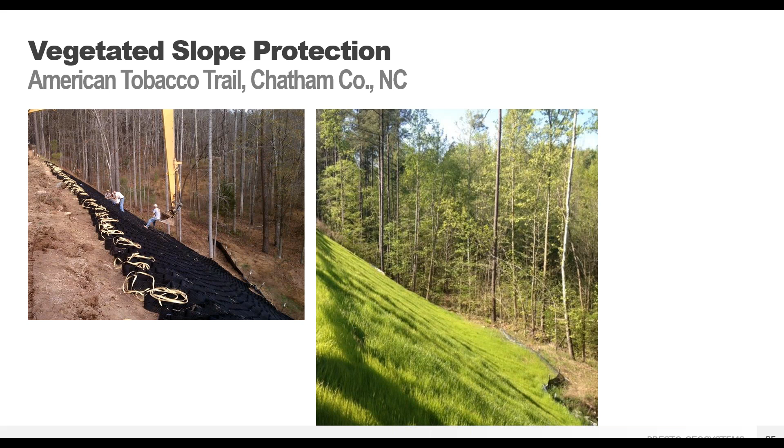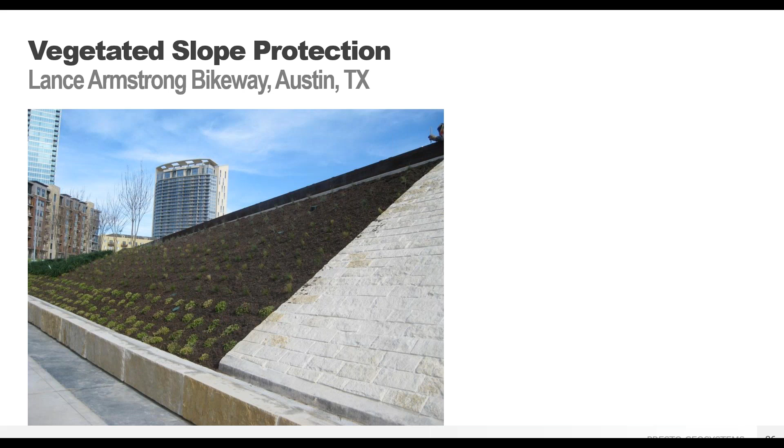In summary, Presto Geosystems offers GeoWeb, GeoPave, and GeoTerra that can meet any trail design needs, as well as GeoWeb for earth retention and slope protection near trails. Each product is designed to protect the surrounding environment while offering a low maintenance surface that won't wash away during heavy rain events. We offer a complete solution, including connections and anchoring options.